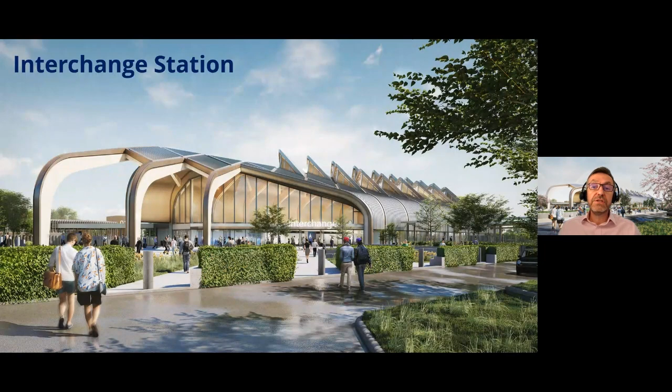So, Interchange Station will be a major gateway station for the West Midlands region and will connect passengers to city centres across the UK. When fully operational, passengers will be able to reach Manchester in just 37 minutes and London Euston in 38 minutes. There will be up to 5 trains per hour in each direction stopping at Interchange. Interchange Station and the proposals from the Urban Growth Company for the development of the area surrounding the station will mean that this area will become a hub for economic growth.

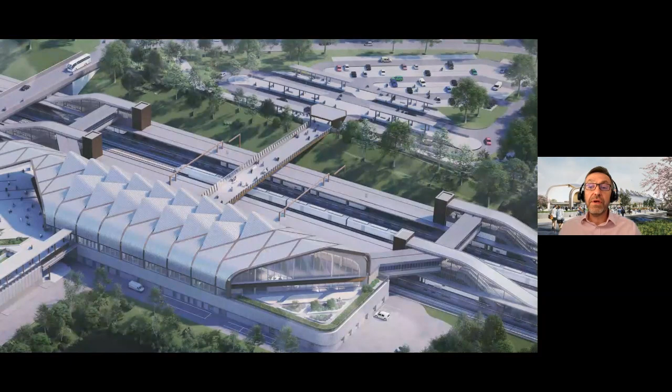The station will be comprised of the concourse building and 2 island platforms, each 415 metres long, which will provide 4 platform sides that trains will stop at. The automated people mover connects to the station and will carry up to 2,100 passengers per hour in each direction. You can just see the linear feature that is the Interchange Station APM stop at the bottom left-hand side of this image.

So, what is an automated people mover? Automated people movers consist of automated, electric-powered, driverless vehicles typically operated on steel or concrete guideways or viaducts. The appeal of people movers is their relative simplicity when compared to underground rail projects.

The origin of people movers dates back to the late 1960s and early 70s, when they were first developed as part of mass transit systems, particularly in the USA, in response to growing congestion and pollution in city centres due to increased car usage. Now, over 50 international airports around the world feature or have plans for people mover systems to transport passengers between terminals or connect other public transport systems to adjacent cities.

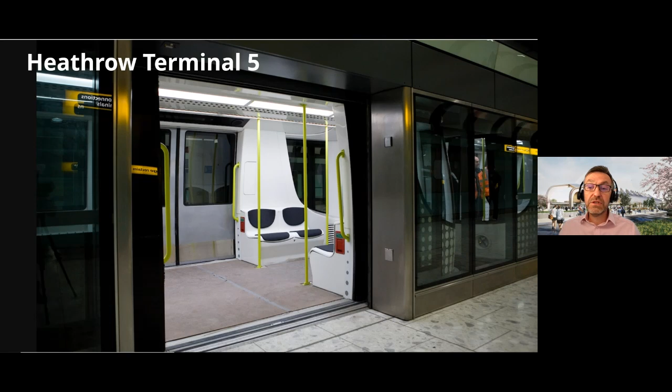Now, in the UK, you may be familiar with the people mover at Heathrow Terminal 5. This is an image of that. The Terminal 5 APM links 3 stations and runs in a tunnel around half a mile in length. The system uses a fleet of 10 vehicles which convey over 6,500 passengers per hour in each direction.

A people mover that is due to open this year is the Luton Airport Dart. This is a 2-track mass passenger transit system carrying passengers the 2 kilometres between the Parkway station and Luton Airport. The operation of the system will be supervised remotely by an operations controller based in the Parkway station. The system will be capable of carrying 2,730 passengers per hour in each direction.

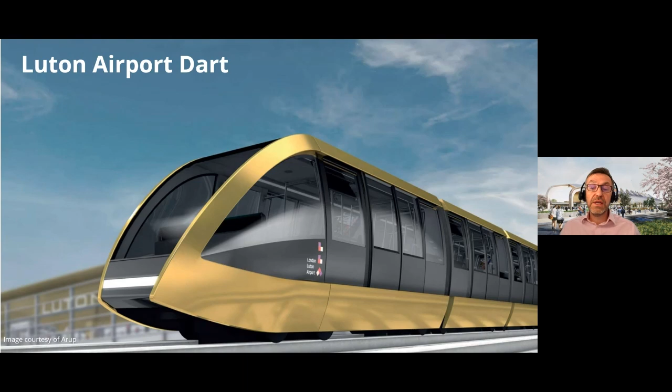A little bit more information on that one. The trains are propelled along by a traction cable mounted in the centre of the track. Each train consists of 4 cars closely coupled with open gangways to allow passengers to walk through the train. The trains are provided with wide doors to allow rapid boarding and alighting and are designed to take a peak load of 170 passengers. The journey time from the Parkway station platform to arriving at Central Terminal Station is just 3 minutes.

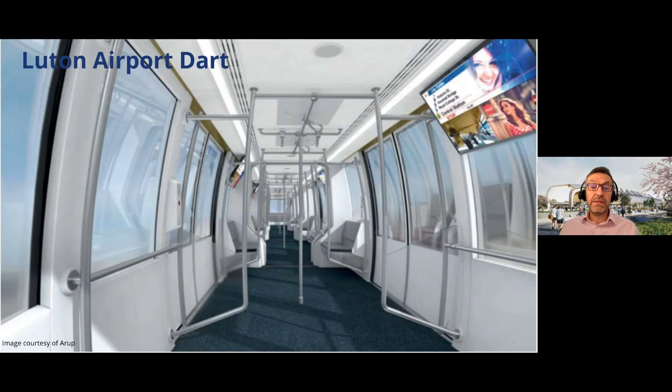So, moving on to the APM itself. What is the role of the APM at Interchange Station? The APM is designed to take passengers from Interchange Station in a seamless onward journey to Birmingham International Airport. Passengers will be able to alight from a train at Interchange and transfer to the APM directly from the station concourse and be at the airport stop in about 6 minutes without the need to transfer to buses or taxis.

With services operating every 3 minutes, passengers can also alight at the other APM stops for the National Exhibition Centre and Birmingham International Station for onward travel to other stations on the wider rail network. The system will be capable of carrying 2,100 passengers per hour in each direction over a viaduct for the entire route. Just some dates to give you an indication of where we are. Planning approval was received in 2020, with construction due to commence in 2027 and passenger services due to start in 2029.

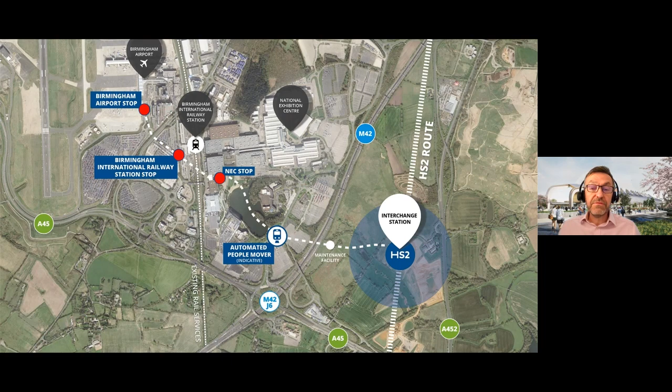I'm now going to hand over to Chris, who is going to cover more detail of the architectural and structural design principles of the APM.

Hi everyone, my name's Chris Jackson and I work for Arup. We are a firm of over 16,000 people globally, undertaking design engineering consultancy. For the past few years, I have been leading the APM design teams, developing the scheme design and planning submissions, with a team of over 100 specialists contributing at various points, and this has been based in our offices in Solihull.

I'm going to talk through the design development of the APM, running through from the site context in where it sits, through the high-level design vision and targets we set ourselves, and then how this is applied to achieve the design that you may have seen in the planning submissions.

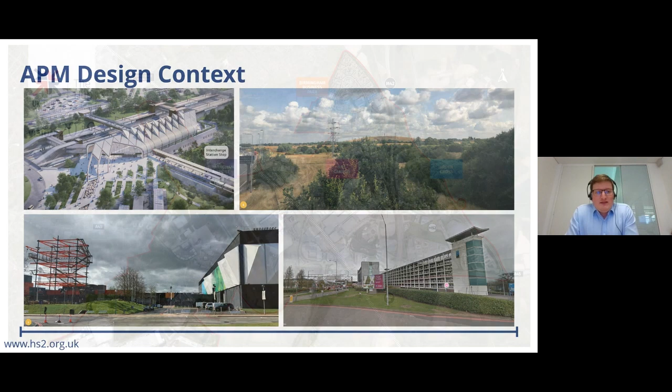Added to this complex existing picture is the future. This is a highly dynamic site with many developments planned as part of various schemes in the area, in particular the UK Central scheme, and this will change many of those land uses from what they are now. So what the APM sees today almost certainly won't be what it sees in the future.

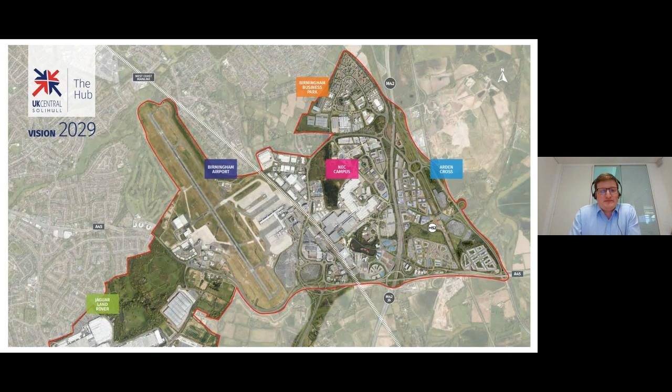In light of that, it's worth touching on something that we're not going to focus on in this session, but some viewers may be aware of. This presentation is going to focus on what's known as the base scheme, that being a development of the alignment for the people mover put forward as part of the HS2 Act.

However, we have also been working on an option with the Urban Growth Company to realign a section of the route in order to future-proof plans for redevelopment of Birmingham International Station, and also by doing so maximise the opportunities for commercial development around that station.

At the moment, we are working and progressing these two schemes in parallel, and we expect there will be a decision point in the summer this year about which option is taken forward to construction, with UGC currently working with its partners to identify and secure the additional funding required for the realignment so it can fully enable commercial development opportunities for the future transformation of Birmingham International Station.

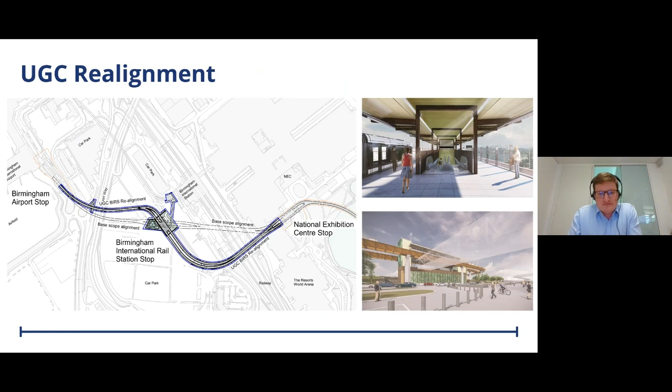So moving into the design, I'm going to start with the very high level principles. Within this complex and variable site, how did we establish what our principles were? Our starting point was HS2's route-wide principles, that of people, place, and time.

This is aimed at making sure that the HS2 system is designed for the people that come into contact with it, however that may be, and that's through accessible design for users and design quality for those who see the system.

Place refers to creating designs that give a real sense of the place they're in, that create places for the future and respond to the existing narratives that already exist.

Time we refer to is designing long-lasting, durable structures that are high quality now and into the future, so will stand the test of time.

So applying this to the APM, the focus on people has two sides. Firstly, the user of the system. To address this, we have designed with the aim of creating simple, intuitive passenger journeys through the stops that work for all our users, regardless of accessibility issues they may have as individuals.

As part of this, we apply consistent design principles across the stop, but in order to respond to the place aspect as well, we create the ability for elements of the stop to be tailored to their location.

For the viaduct structure, the response to people is largely the many thousands of people a day who will see this structure from various angles, be they at the NEC, users of the M42, the West Coast Main Line, or the stations. To respond to this, we have focused our efforts on making the structure both visually light and having a low footprint on the ground, so as not to make the ground underneath the structure unusable.

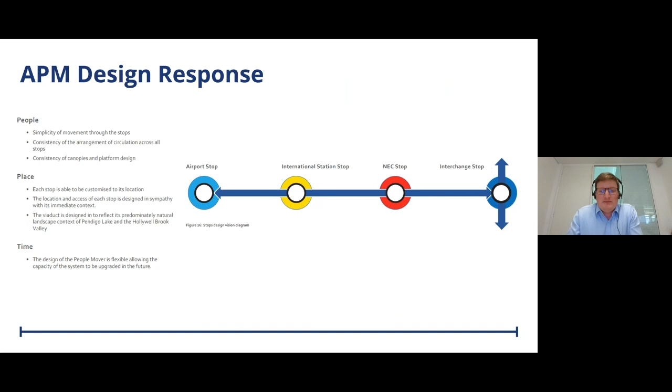So from the high-level principles, we derived some more detailed considerations and aspirations. Firstly, we wanted the APM to respond to its site. We needed and wanted the engineering to be efficient to give best value, whilst also achieving the structural requirements.

Due to the challenges of the site, we wanted to make sure that as far as possible, large elements could be fabricated either off-site or in large modules and lifted into place to minimize disruption to the many land users. We needed our spans of the viaduct to be flexible because the obstacles we cross are not all uniform. We wanted and needed the structure to be durable, so it will last a long time and it will provide

value by being usable for as far as we can possibly see ahead. The design had to respond to the functional requirements of what the APM system was, and I'll show a slide on that in a moment. And then the final two are key as well. The design had to be accessible. HS2 is trying to be accessible to all users, and the APM is no different in that regard. And finally, we wanted the design to add quality to the area, so to be an aesthetic design that visually people would enjoy, and not just the bare bones functional design that can sometimes occur.

So with these high principles set, I'm now going to talk through each of the key elements we designed, starting with the viaduct.

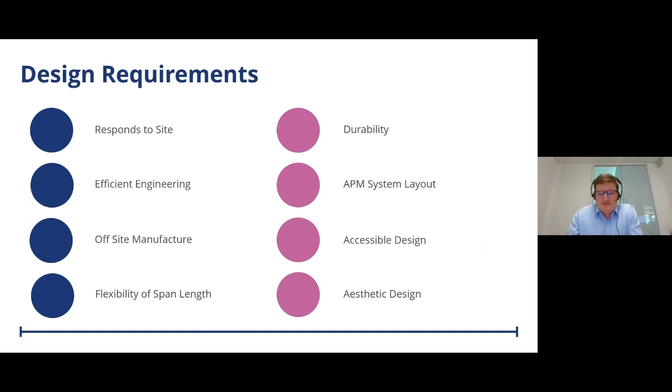So in the design of the viaduct, the starting point was to understand what the viaduct was carrying. The APM system is unique within the HS2 project, and the viaduct structure was therefore developed from first principles to meet the specific requirements of it. The route includes areas where we have single track, areas where we have two tracks but on one sort of bridge deck, and areas where we have two separate structures running in parallel.

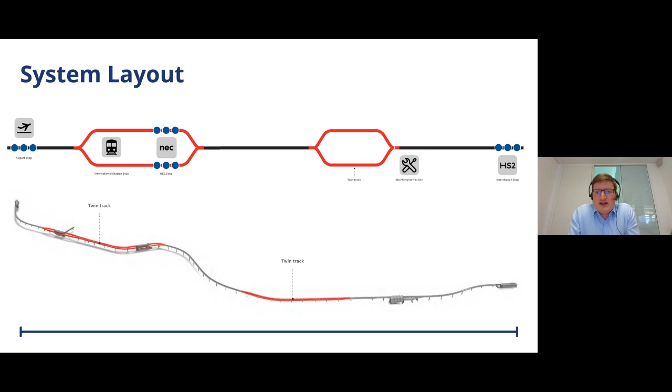And you can see this on the plans at the top on this slide. Combined with this layout, the viaduct also needs to be capable of crossing a range of obstacles, which include the M42 motorway and West Coast Mainline Railway, with spans of up to 70 meters, plus multiple car parks, green fields, lakes, many local roads of different scales of magnitudes, and also even a building at the NEC.

This reduced the depth, and from that we then did various pieces of detailing and design to enhance the appearance, such as inclining the beams in slightly. So rather than a vertical face, you have an angled face, and we worked very hard with the fin type stiffener elements, which are a structural requirement for the beam and to support the walkway, to shape these and come up with a design that provided the structural requirements, but also was shaped and considered and enhanced the aesthetic overall.

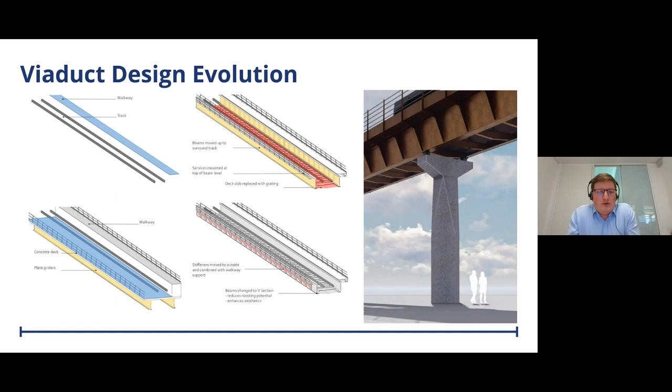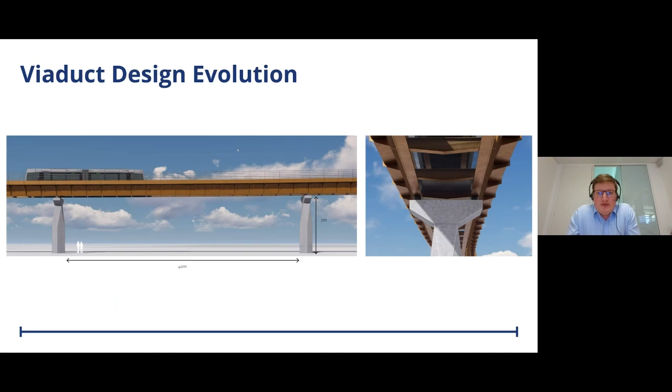So following that design process, this slide shows a couple of visuals of the viaduct form. It shows the standard deck and span proportions on the left, and a bit of detail of the pier head on the right. The entire line of the APM route uses a structural form derived from these studies.

A key part of the viaduct design is also the materials. In choosing materials to build a viaduct, it is essential to consider strength, durability, and appearance, and how it is going to be built.

For the deck of the APM, the eventual choice of material was to use weathering steel. This material provides an opportunity to fabricate large modules at ground level prior to lifting into position, essential when you're working across a range of sites with multiple activities going on that the APM passes through. These sites mean that access is naturally restricted and difficult for construction.

The material itself is not painted. It develops what's called a protective patina over time, where it moves from quite an orange color initially to a much deeper uniform brown color. This patina also acts to protect the structure from future corrosion, therefore no painting is required.

The columns themselves are reinforced concrete, which is strong, durable, and also a very good material when you have vehicles moving around, as it can withstand impacts from vehicles at ground level, and it also provides the visual contrast with the deck.

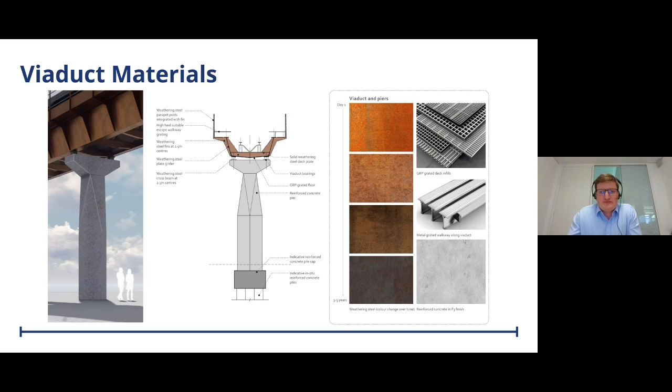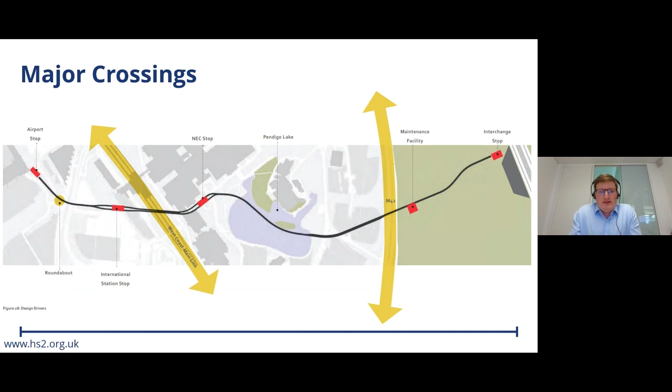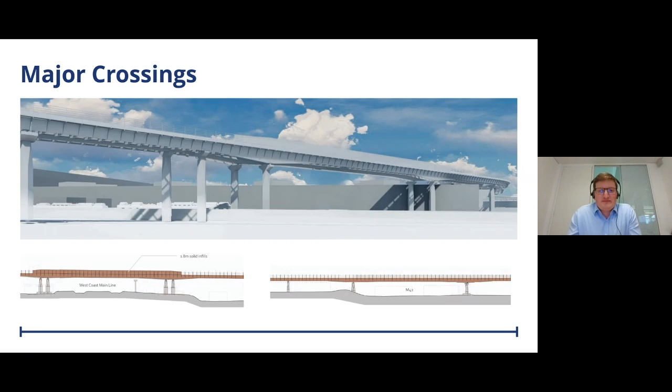So combining all these features, this slide shows visualizations of the viaduct across the route. I think it does show the successful combination of the engineering and the architecture into a single structure. Particularly the top image shows the slender deck and the benefits of the studies to make it thinner than would normally be the case, and the pier spacings do prevent it impinging on the landscape too much.

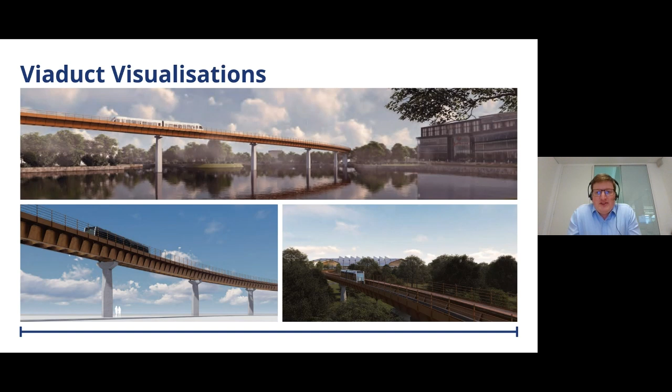So next, I'm going to move on to describe the design of the buildings across the APM route and site.

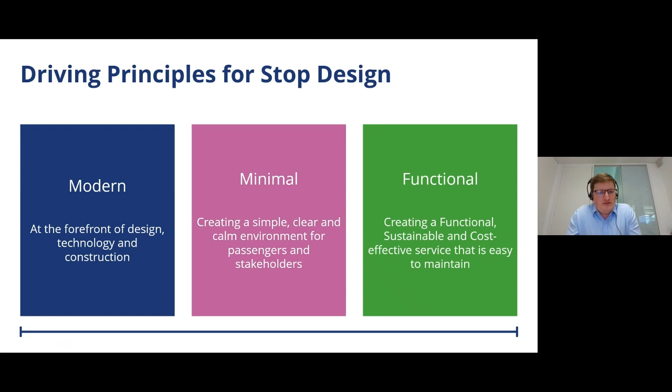As previously mentioned, there are two main categories. Sorry, the slide's slightly out of sync.

So what are the technical drivers for the stops? Firstly, the alignment - the location, orientation and high-level layout of the stops are all determined by the alignment of the route, which in turn has been determined by the site and studied over the preparation of the hybrid bill and more recent works. The stops are then required to provide weather protection to users to ensure comfort when using, and although they are not internal spaces, they do need to be a comfortable place to stand and wait for the APM, albeit that the time you're waiting is only a few minutes.

With the APM largely at height, vertical circulation is a key component of each stop, with requirements for both efficient transfer of passengers between levels, but also providing vertical transportation that accommodates all users' needs and is readily available when wanted.

APM systems themselves require a range of plant, mechanical and electrical equipment in order to operate safely and efficiently. As a self-contained system, this all needs to be contained within the stops themselves, with all the services that connect the stops for communication, power, etc., carried between the stops on the viaduct. And finally, the stops need to be appropriate for use in all weather conditions, which, as we know, can be a bit variable in the UK.

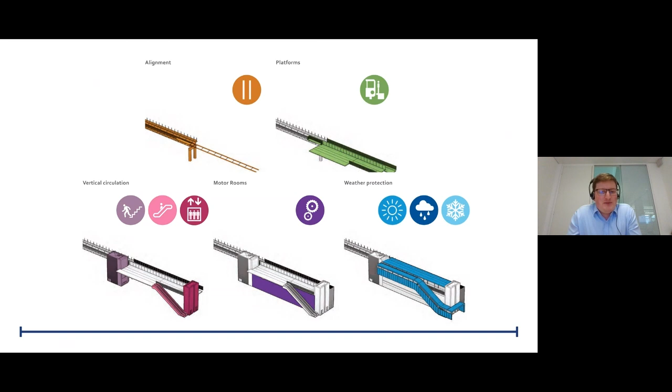Within the APM system, there are three main categories of buildings. There's the terminus stops at Interchange Station and Birmingham Airport that have single-sided platforms, required to house the majority of the equipment to drive the system. The intermediate stops at the NEC and Birmingham International Railway Station have island platforms, between two tracks, with much lower levels of equipment provided as they are within the intermediate part of the system.

And then finally, there's a maintenance facility building that is not publicly accessible and provides a base for maintenance, cleaning and repair of the APM vehicles, located adjacent to the M42.

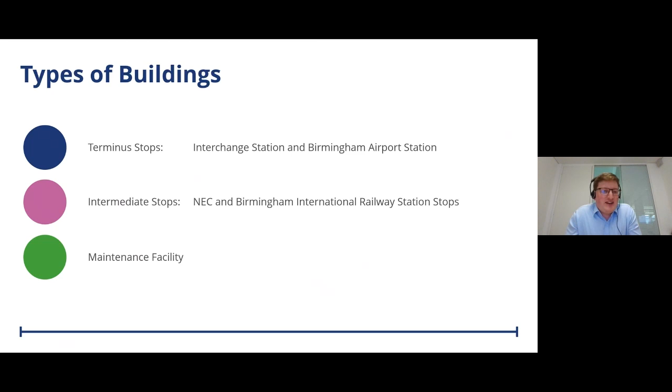So looking at the differences between the two main categories of stops, the terminus versus the intermediates, this slide shows a terminus stop on the left, in this case Interchange Station, and an intermediate stop on the right being the NEC. These exploded diagrams show the layout.

The terminus stops are conceived as multi-storey independent buildings with the levels under the platform to house plant and motor equipment. The single-sided platform is then effectively on the roof of this plant area. At the Interchange Station stop, the building is recessed into the landscape, giving level access from the platform onto the station concourse and onwards to HS2 train services. At Birmingham Airport, escalators are used to bring passengers to ground level.

For the intermediate stops, the approach is very different. The system layout requires an island platform with APM vehicles on each side. To achieve this, the APM viaduct continues through the stop on each side of the platform, with the platform structure then spanning between the two decks. In effect, the stop is hanging off the viaduct.

Lift cores and escape cores provide vertical elements for access, with a single-storey plant building at ground level. Escalators are provided up to the island platform from ground level at the NEC, and to a mid-level mezzanine at Birmingham International Railway Station.

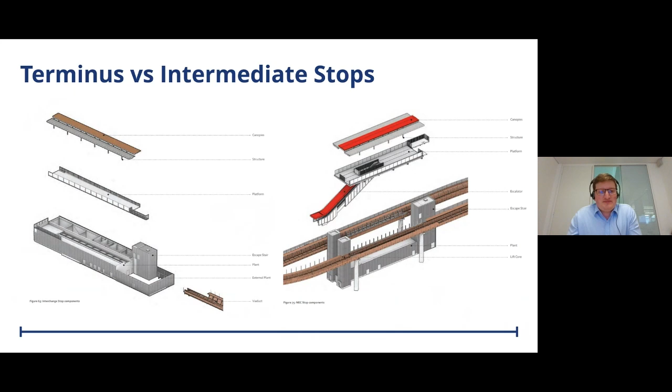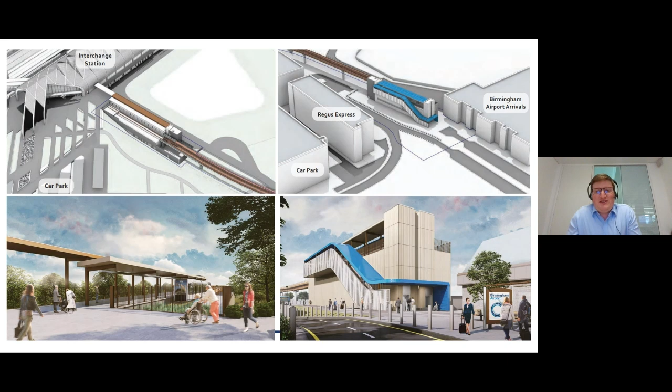For the airport stop, this feature also integrates and wraps around the lift shafts, which are located to ensure that passengers requiring their use can easily locate these and do not have to deviate from their natural route of travel in order to do so.

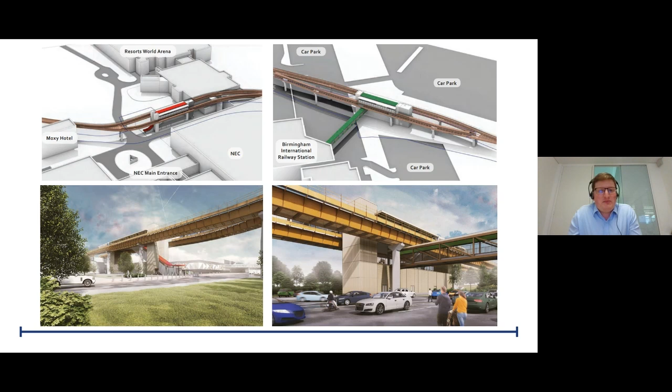On the right-hand side is the Birmingham International Rail Station stop, which rather than having ground level access, the escalators and lifts meet on a mezzanine level with a link bridge directly into the existing International Rail Station concourse. This separates passengers and traffic at ground level.

So I mentioned earlier that we'd also try to apply common elements throughout the stops. So I thought it was worth touching on what we mean by this. So within each stop, the design aims to provide consistency of passenger experience. This means that features that you see from within the stop, such as canopies, the lifts, the escalators, the platform edge barriers, signage, etc., are repeated elements that are used exactly the same way in every stop.

In addition, we have the coloured roof feature, which denotes the primary passenger route through the stop and is intended to aid intuitive and simple wayfinding. This is also enhanced by ensuring that there are clear open sight lines whereby the exit route or your route to the platform is clearly visible from entering or leaving the stop.

The smaller details such as signage, departure boards, etc. are also consistently applied across the route. This approach means that internally, all the stops have the same internal design language, which gives consistency to the user across the route.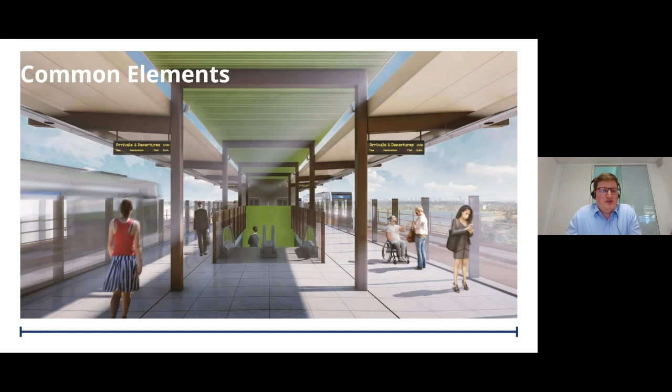So I'm now going to move on to the maintenance facility building. The maintenance facility is by its very nature a very different structure. It is located partway along the APM route adjacent to the M42 motorway. It is a private building and therefore public interaction is largely from a distance from the M42 motorway or from the future developments that may take place around the site, or indeed from an APM vehicle passing by on the viaduct.

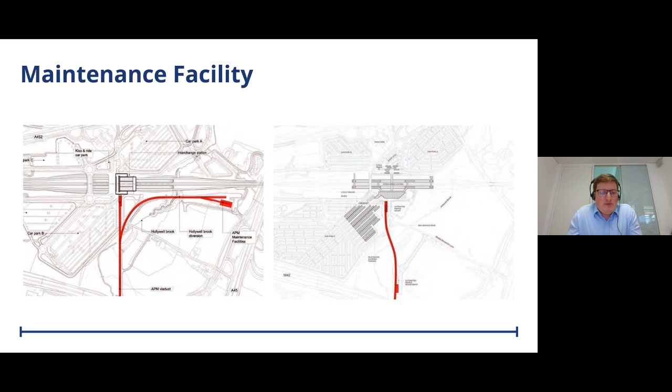Unusually for a maintenance building for rolling stock, the activities largely take place at an elevated level. This is a direct result of an early design decision to move away from the hybrid bill layout, which is on the left of this slide, where maintenance took place at the end of a long spur off the main route to the south of the interchange station. By removing this spur, both the physical and carbon footprint and the environmental impacts of the scheme were significantly reduced, and more land was left available for further development opportunities.

So onto the building itself. With the location decided, the design approach became to define the operational space requirements to carry out its maintenance function and to package these into an efficient building structure. Once the core operational shapes and areas were determined, the form of the building was developed.

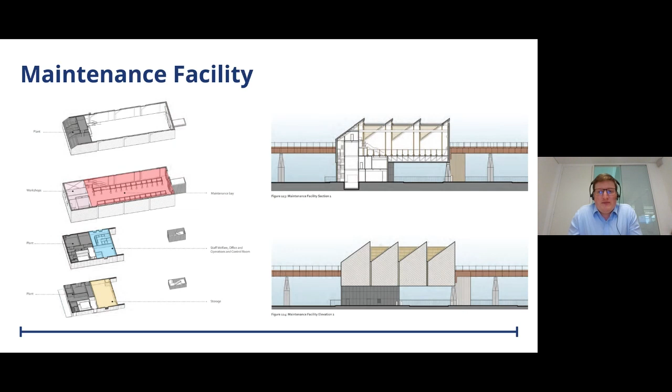The location and height of the structure meant by necessity it would be a large building. Combined with most views being from a distance, it was decided that the best approach was to use large, simple shapes and simple coloured materials to create a strong visual form, devoid of fussy detail. And this form was derived from industrial buildings in the region to give context.

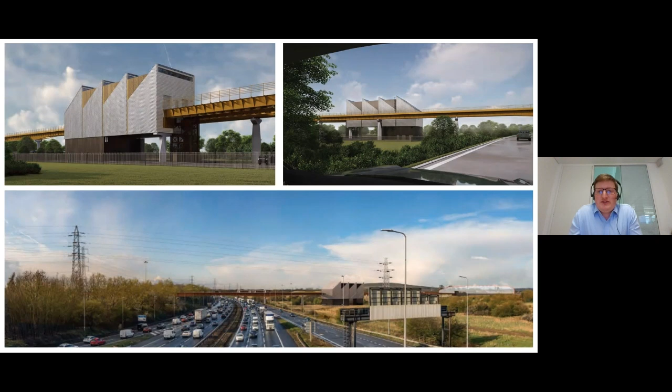So this slide shows visuals of the structure from a number of angles. The top two are each side of the building. The one on the left being from the adjacent fields and site, and the one on the right being from the M42 as you come off the southbound off-slip. And you can see the viaduct passing through as well.

The bottom image is the wider context and is taken from the NEC exit road bridge that crosses over the motorway. This shows how the building presents against a congested backdrop of infrastructure and structures, and why there was this need for such bold shapes and form to be distinctive in the landscape.